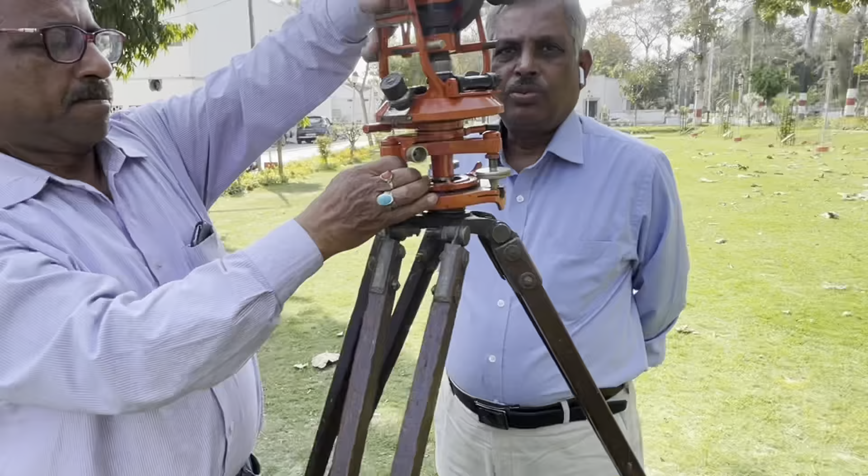So this is the tripod. We are going to mount the instrument. This is kept in a box in a special manner, and this is the 20-second vernier transit theodolite. The fixing of the theodolite on the tripod, and this is the plumb bob.

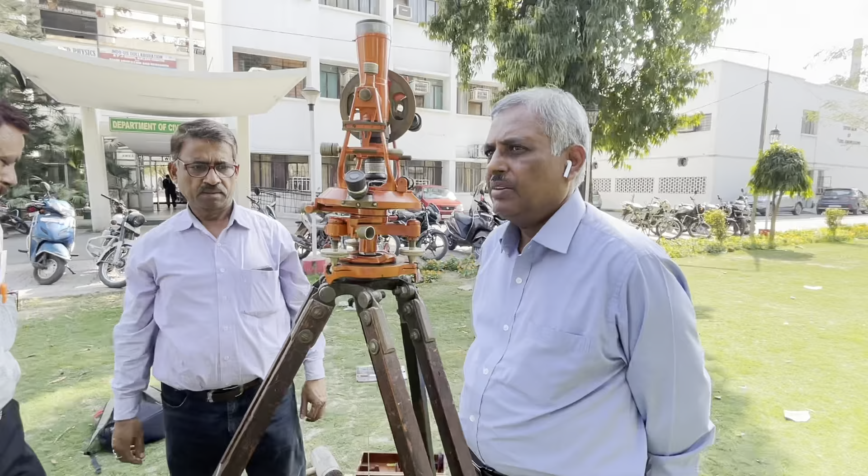Here we can take, this is the vertical axis of the instrument, and to locate the plumb bob shows the vertical plane. So in this instrument there are two planes, vertical plane and horizontal plane. Both are there, horizontal axis and vertical axis. Whereas in the dumpy level there was only a vertical axis, there was no horizontal axis.

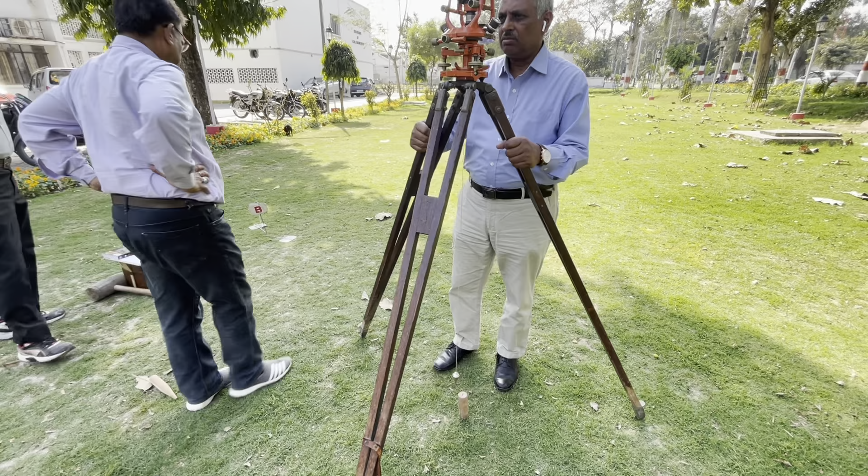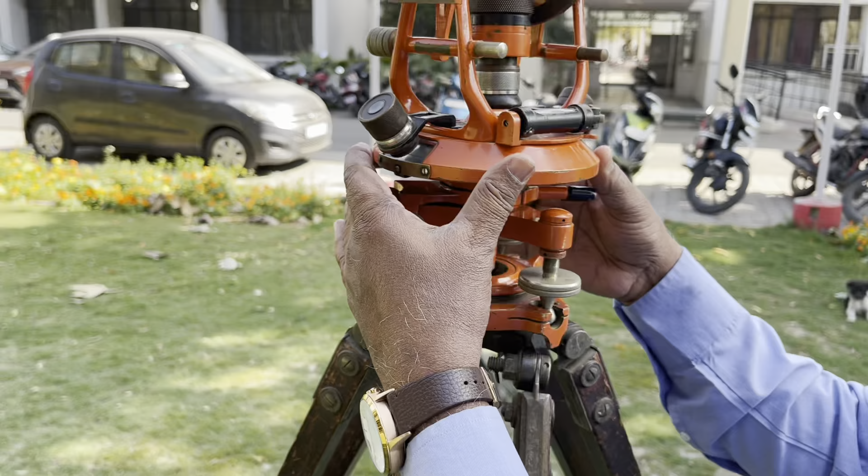So now we can start with the different parts of this instrument. This is the tripod, as it was used also in the automatic level or in levels. These are the three foot screws. With the help of this bubble, which is called a plate bubble tube, this will be leveled, and this is for making parallel two of the foot screws, because this is a longitudinal bubble.

So we have to ensure the bubble is in the center. We have to use these screws either both inward or outward - one will be clockwise, the other anti-clockwise. So both will be inward or outward.

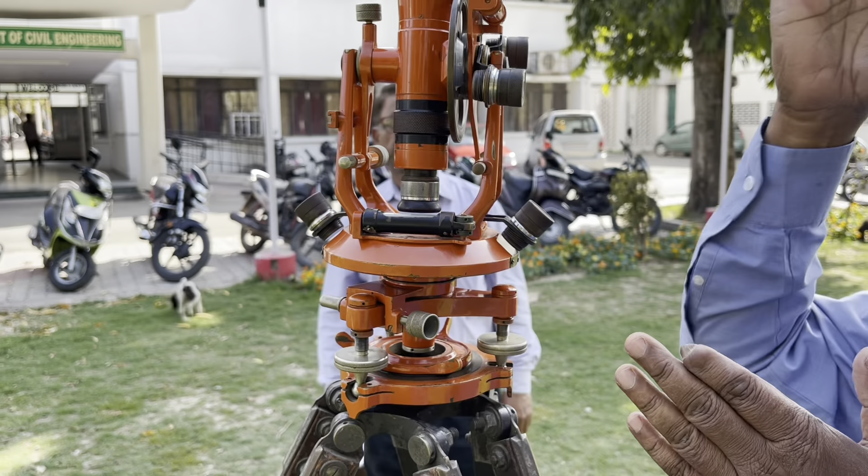Then you turn this by 90 degrees, and with the help of this, in this plane the bubble has been adjusted since it was centered in this plane. Now perpendicularly it has not been adjusted, so with the help of the third screw you bring the bubble to the center, and therefore the perpendicular plane, and the plane perpendicular to that, is leveled.

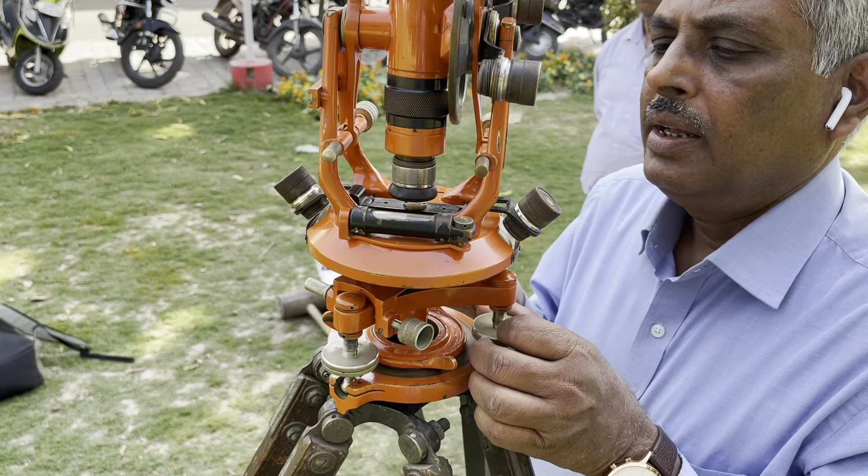So the whole telescope plate is parallel to the ground. This is the bubble in the center. Again we check at the earlier station and see the bubble is out. These are parallel to these two foot screws. Then you have to bring the bubble to the center. One or two trials you have to do, then it will be at right angle, and with the help of the remaining screw...

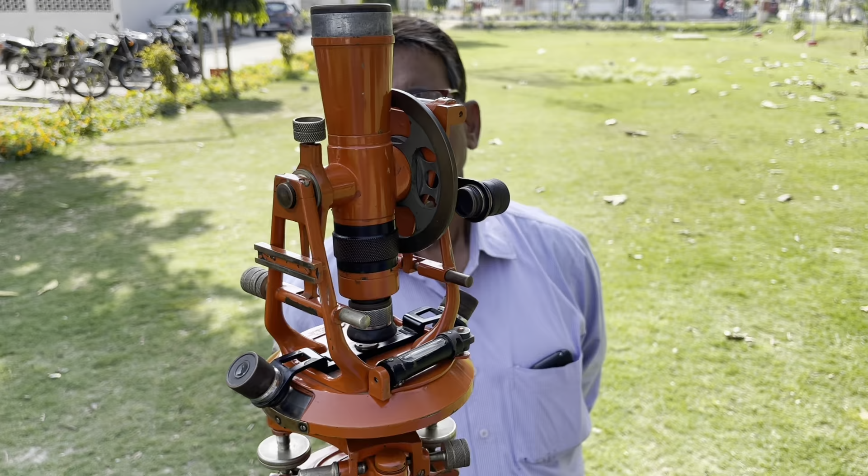The bubble is in the center. So after one or two trials, the bubble being in the center means the horizontal plate level is parallel to the mean spheroidal surface and mean sea level. That is also called geoid.

Now I am going to give the nomenclature of different parts of this instrument. These are the foot screws or leveling screws. These are the two fixing screws. There are two plates here.

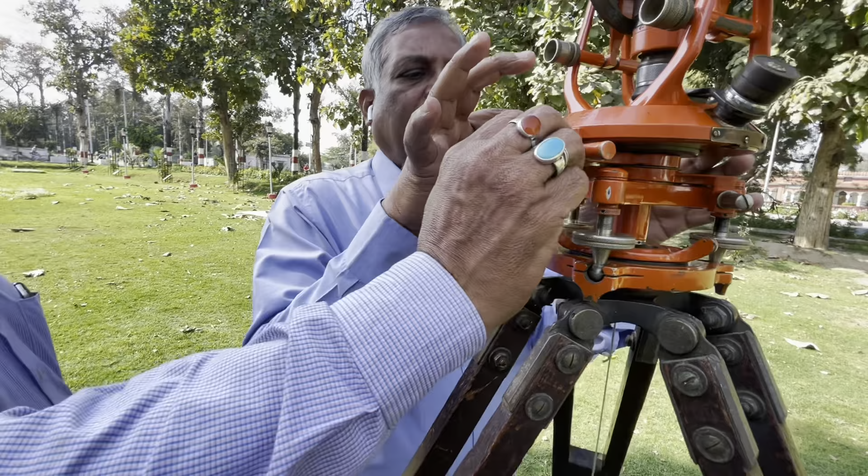One plate moves on the lower plate, the upper plate moves on the lower plate. This is the lower plate clamping screw. This is the lower plate. If you clamp it, the lower plate will be clamped. Then the lower plate is clamped. This is the upper plate clamping screw. If you clamp the lower one, the lower plate will be clamped, and the upper will be moving on the lower because it is free.

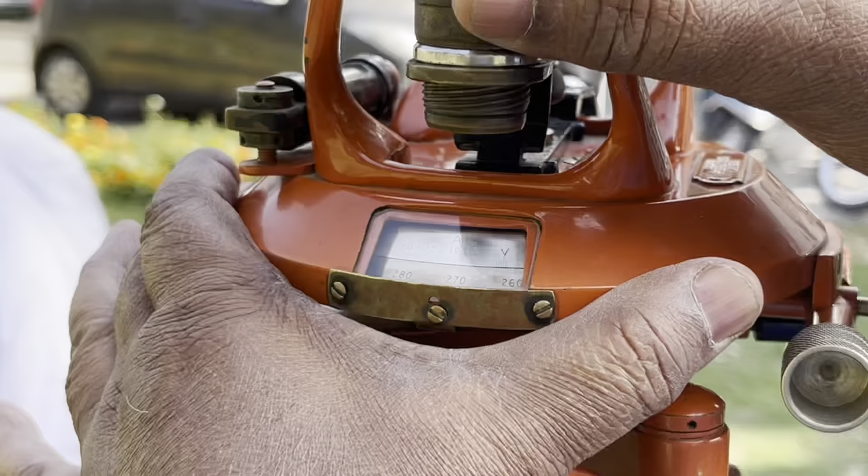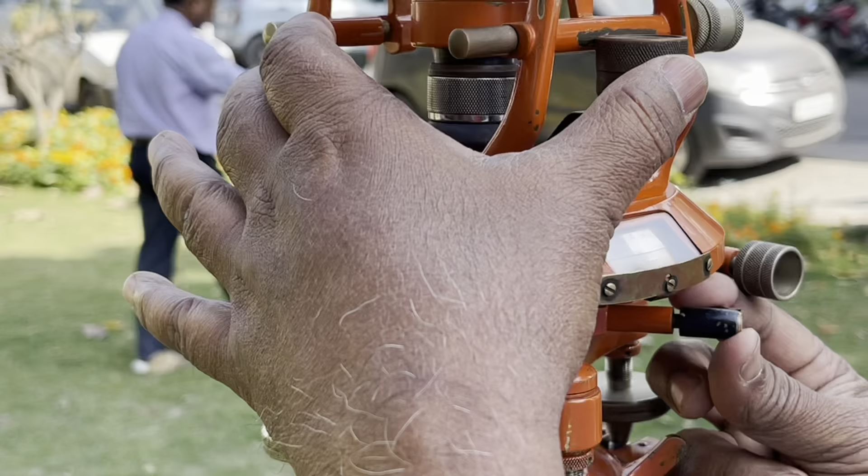So the upper plate will be moving on the lower plate. You can see the upper plate is moving, not the lower. But if I fix both, nothing is moving. If you open the lower plate, both plates will move simultaneously. There will be no change, only both plates will be moving.

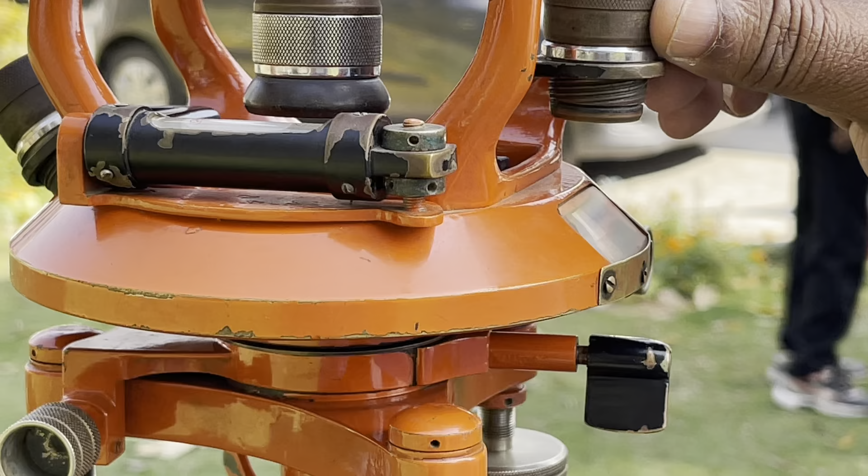So this is the lower plate clamping screw. If you clamp the lower one and open the upper one, then the lower is clamped and the upper is open, so the upper will move on the lower, and then we can read the readings.

These are the two magnifying glasses. There are two verniers, one on this side, another on this side, 180 degrees apart. By simply rotating, the digits on the plate will be focused. These are very small digits; if you use this, the digits will be magnified.

If you want horizontal slow motion, both the lower and upper clamp should be clamped. Upper screw and lower screw should be clamped, and then you can use the horizontal slow motion. This is the horizontal slow motion. If you see, it is slightly moving, very fine movement. This is called horizontal slow motion.

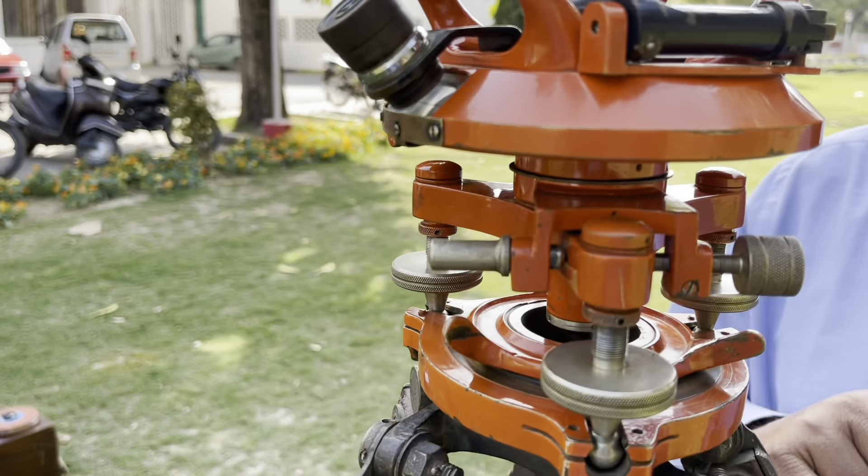So if you want to change the position of the object and the reading should not be changed, this lower slow motion is being used.

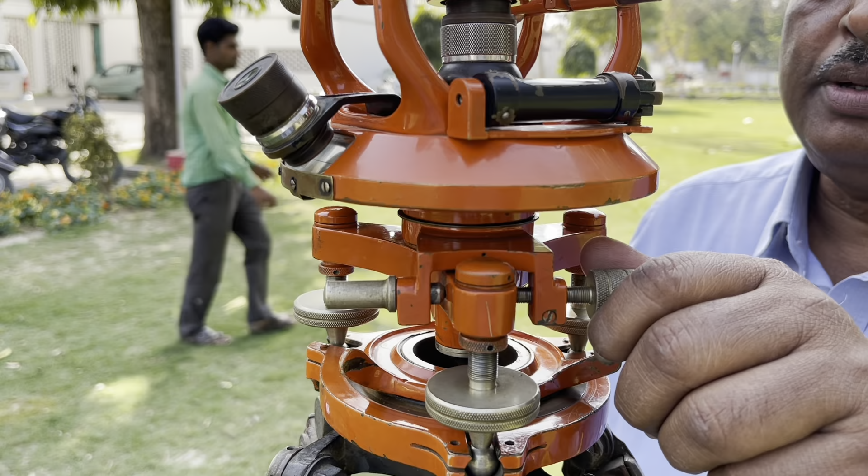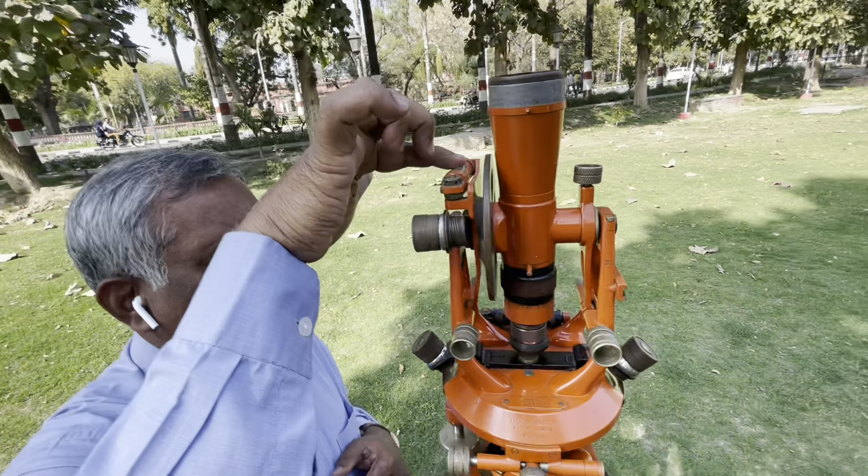Now this is the plate bubble tube for the level of the ground. Now coming up there are two screws. One is just below the one tube. This is also here a tube. A bubble is there. This is called altitude bubble tube. Just below that is called the tangent screw.

Bubble tangent for the adjustment of the bubble. This is just below that. This is called adjustment of the bubble. If the bubble is not in the center, we can bring the bubble to the center with the help of this screw.

This other screw is called a tangent screw, and just below this bubble is called the clip screw, C-L-I-P. This is all known as clip screw.

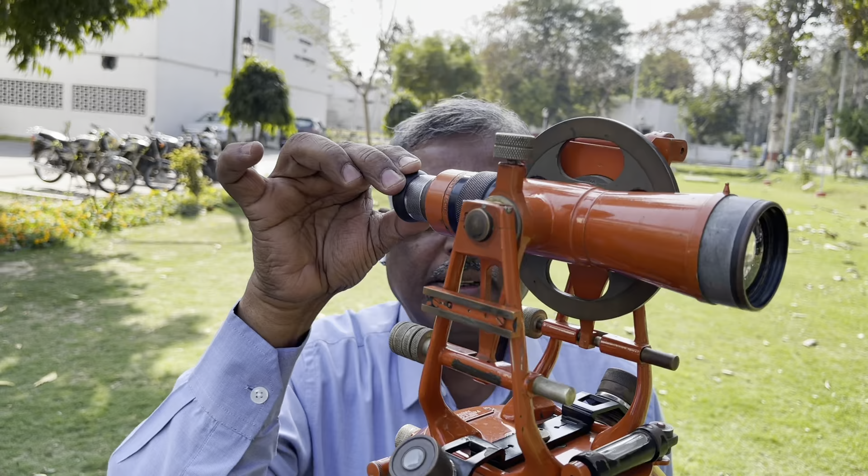Now this is the telescope - if I clamp it, the telescope will be clamped. If I open it, the telescope will be moving. It can move 360 degrees. That's why it is called transit. If it is in this side, and if I make it go to this side, this is known as transit process.

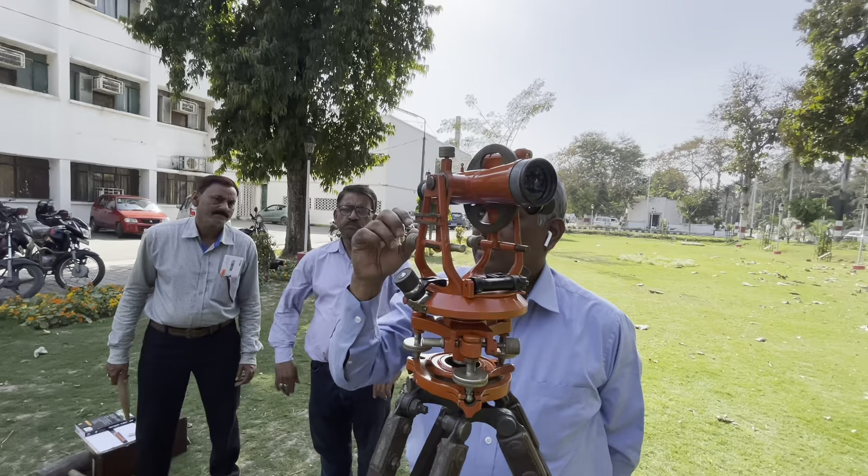And you are seeing this side. Now I am going to see that side. So this facility is known as transit facility. The telescope has been transited. If I close it, it will not move.

And then if I am interested to have slow vertical motion, this screw can be used for slow vertical motion. You can see if I use this screw, the telescope is slowly going upward, and that's why it is called the tangent screw for the telescope, for vertical slow motion of the instrument.

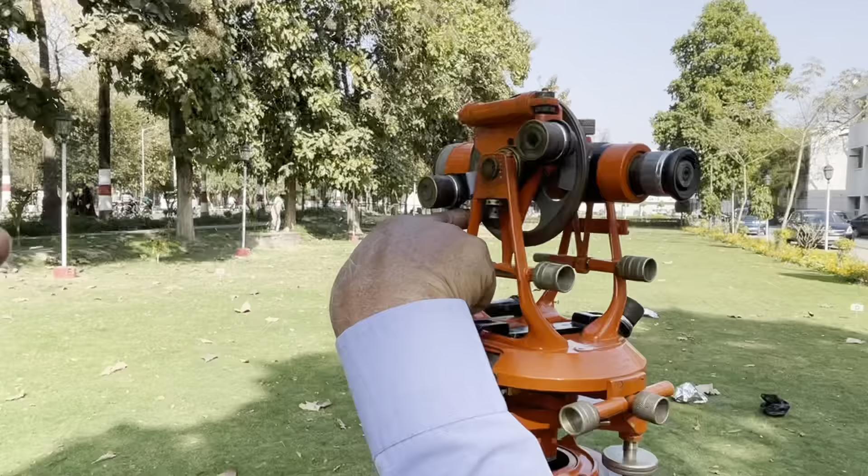Like the horizontal plate, there is also a vertical plate, a circular vertical plate here to read the vertical angles. This also has Vernier scale readings. There are also two microscopes and two verniers. So they are 180 degrees apart.

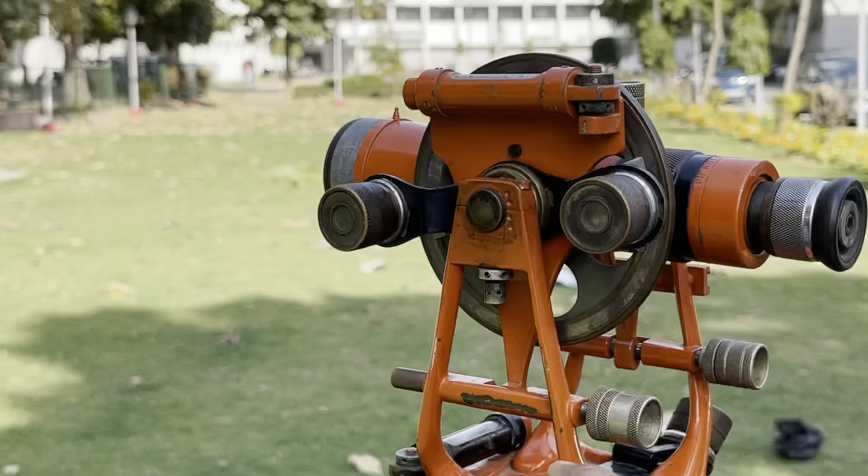So this is the A and B, and this is called the C and D verniers. If it is moving, the other one will also move by the same amount. But if there is any eccentricity error in the plates because of these holes, if this is not the same as this, then we take the mean value to remove the errors.

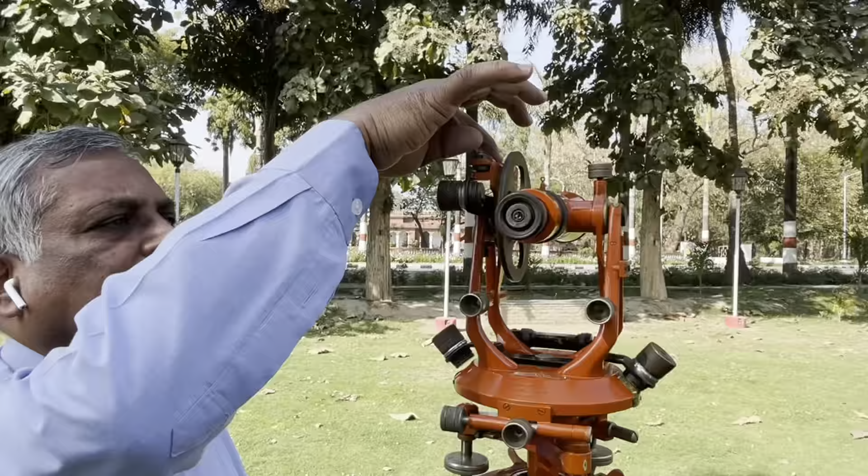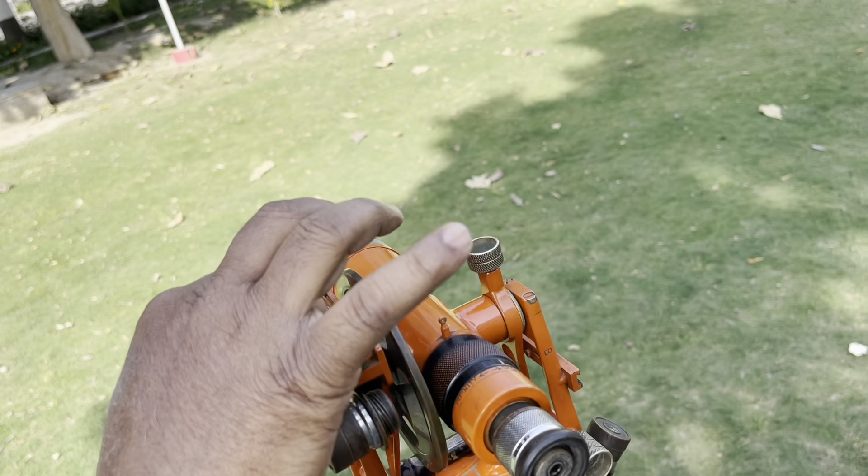So these are the different parts we have elaborated. This bubble is here and it is connected with a nut and screw, nut and bolts. If I want to change the bubble setting, there will be a screwdriver here for this hole. If I use that and move it, the bubble will move. During permanent adjustment, we need to shift some bubble errors, and that's why this is called the capstan headed nut.

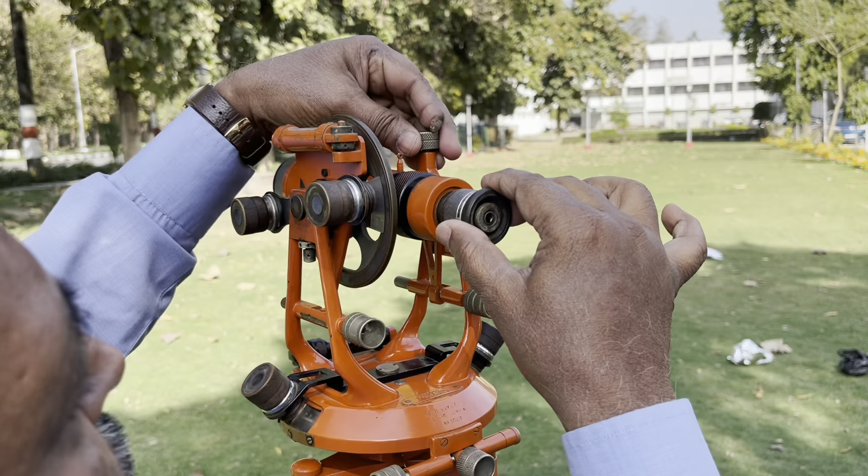And so these are the things. This telescope is moving in the vertical plane about the horizontal axis. So this is the horizontal axis about which it moves in the vertical plane. So this is the horizontal axis, and the instrument is

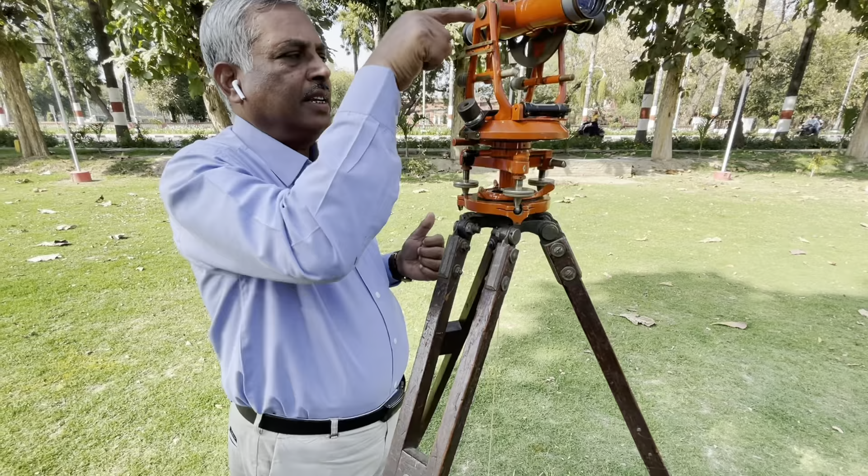moving in the horizontal plane about this vertical axis. So there are two axes: one is the vertical axis and one is the horizontal axis. These two axes must be perpendicular to each other.

If they are not perpendicular, we have to adjust the instrument, and there are different methods to adjust it. It may be taught in class how to adjust the different conditions of this transit theodolite, this 20-second transit theodolite.

So after that, this is the object focusing screw. This is the object glass. This is the object focusing screw, and this is the eyepiece. Due to this, we are moving it, and the object will be focused, but the thing is not coming out.

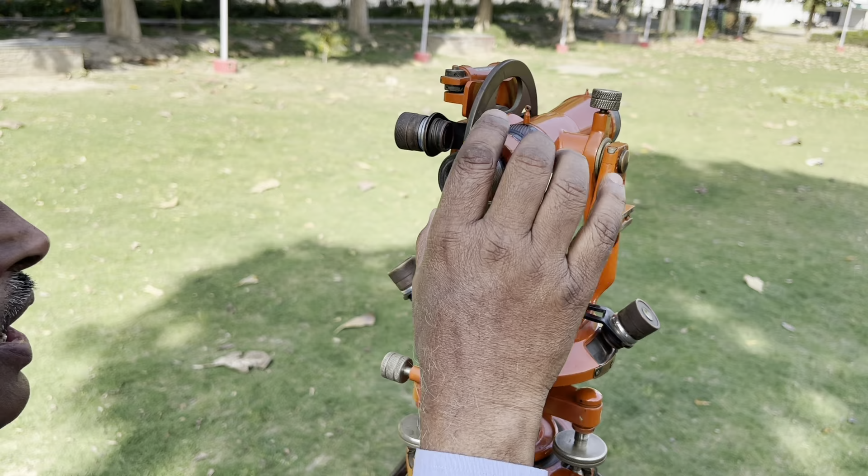That's why it is called an internal focusing instrument. If I am moving this, there is a crosswire here, and that crosswire will be focused. This is called the diaphragm, where the crosshairs are fixed.

There are four screws, one here, one here, one here, one here. So two vertical screws, two horizontal screws. Due to this vertical screw, horizontal wire is fixed, and this horizontal screw, vertical wire is fixed. Therefore these wires are at right angles to each other. If they are not, we have to make it right angle, because it is the condition that

the wires must be perpendicular to each other before using for any experiment. So all this is the diaphragm. Below this diaphragm, and between this diaphragm and objective, near the vertical axis, there is another lens which is called the anallactic lens. With the help of that lens, the multiplying constant will be 100 and the additive constant will become 0, with the help of that anallactic lens, which is provided between the vertical axis and the object glass.

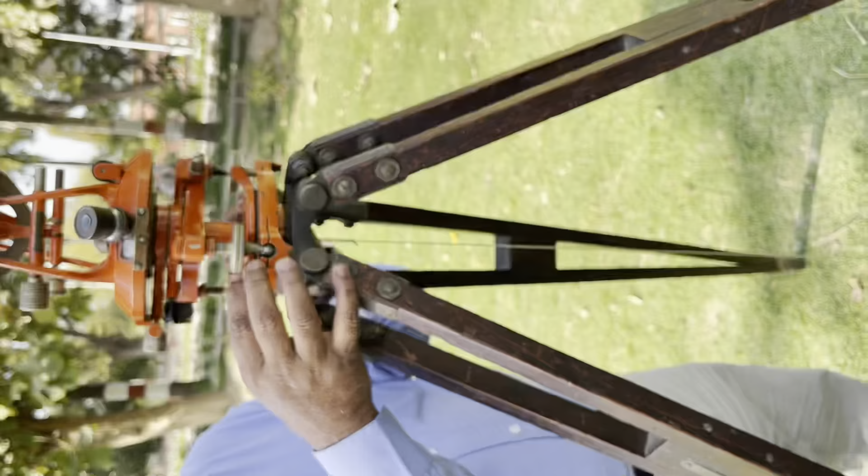So this vicinity we have to provide. This is known as the shifting head. If this is slightly away from here, we can open it and move it here, and centering will be done. If it is slightly out, this is called the shifting head, and then you can clamp it. So this is known as the shifting head.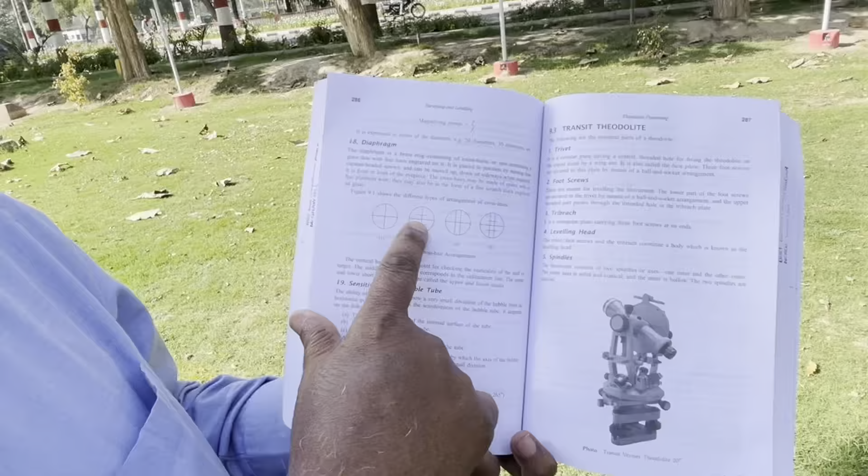Now here the wires that have been mounted, that is like this, this is the wire that has been mounted here. There are many ways to mount the wires. In some instruments, double wires are provided, then stadia wires. In some, two vertical, one horizontal. In one, horizontal, one vertical, and two stadia wires. In one, only horizontal and vertical.

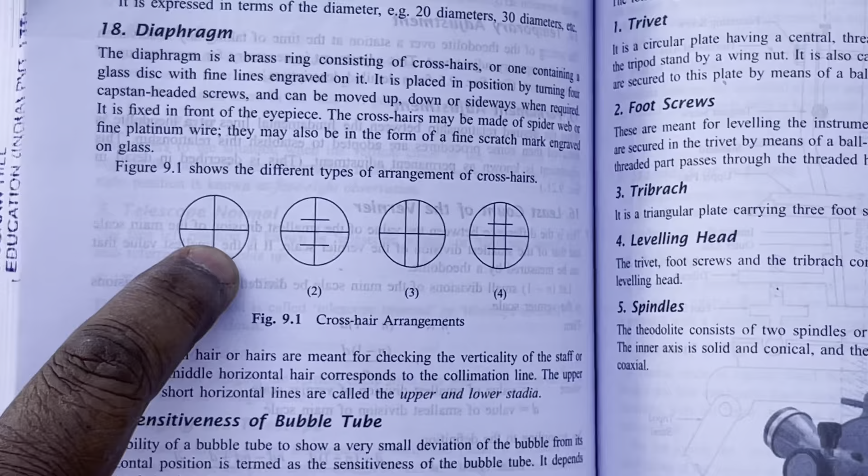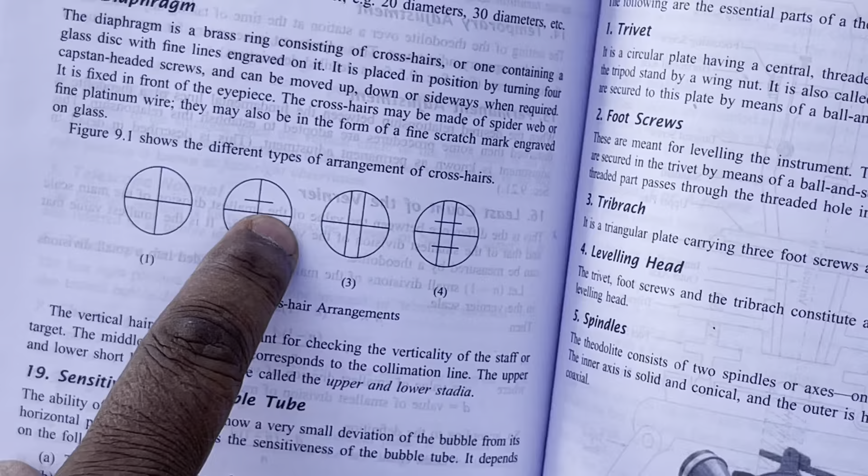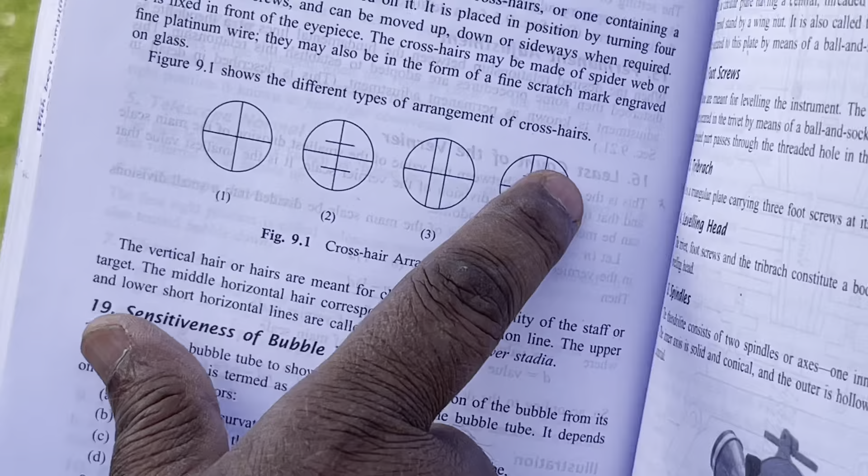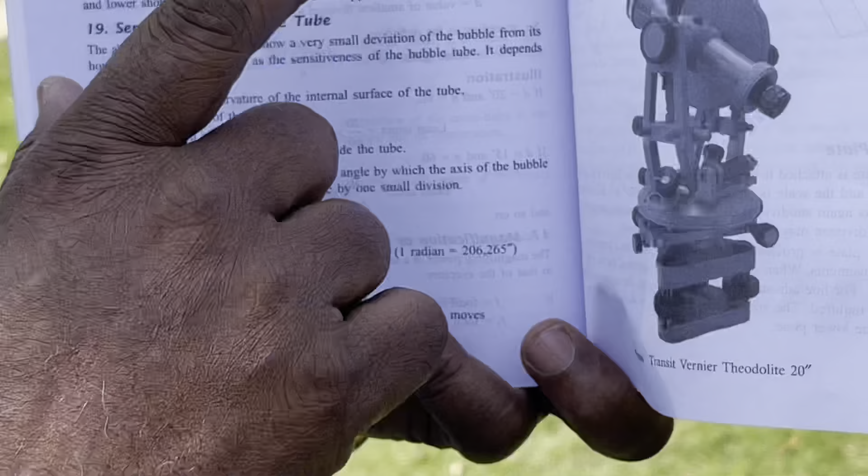If this is used, then you can only read the horizontal and vertical angle; the distance cannot be obtained. If you are using the stadia wires, you read the top wire reading and bottom, then you will get the distance also. Horizontal angle and vertical angle can be read out, and the distance also can be calculated. Here only horizontal and vertical angle, here horizontal, vertical and distance. These two wires are only because of the confidence that this is perpendicular to this, so this is the extra security arrangement.

Now this is the instrument, and this is the same instrument as we are using here. Different parts are shown here. Different parts are here. You can read it in the books also. I have explained different parts, and different parts are being shown here.

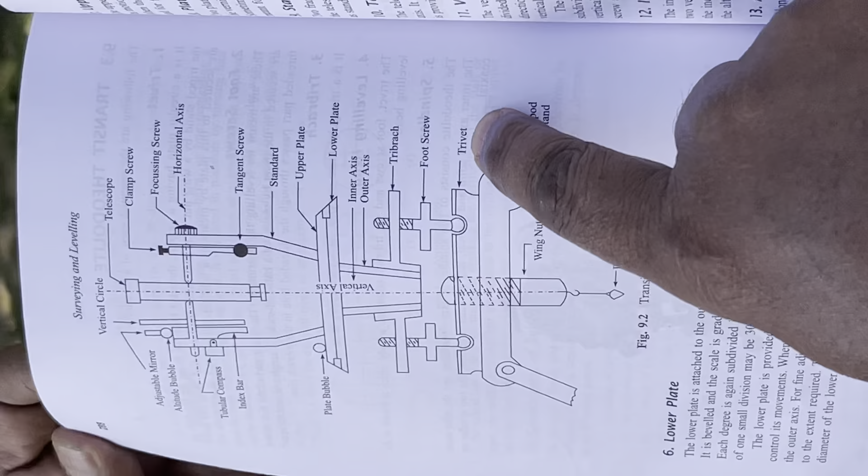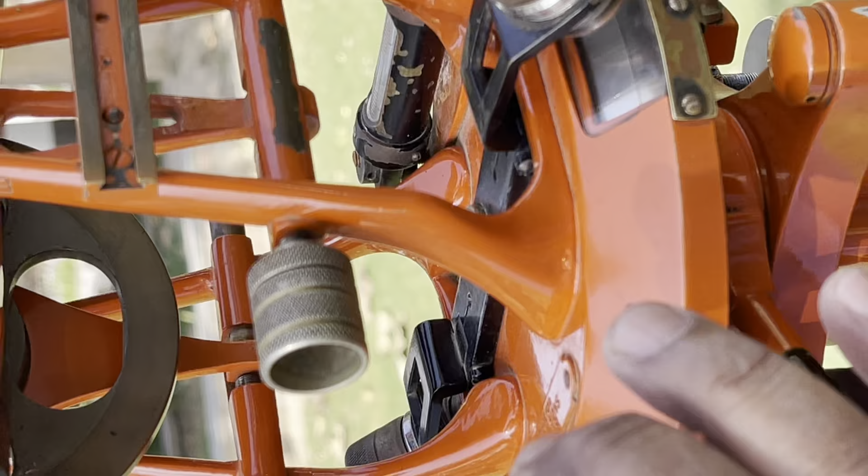A tripod, this is the trivet, the foot screws, tribrach, inner outer axis, lower plate, upper plate, or a standard A frame. This is called a standard A frame because it looks like an A. That's why A frame. And there will be a tangent screw. This is the tangent screw. This side will be the clamp screw. There will be different parts. You can go through this and you will be given the different parts of it.

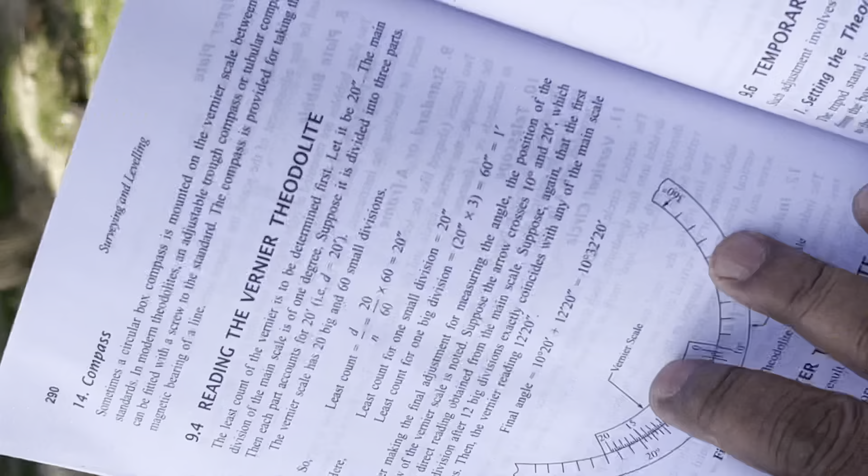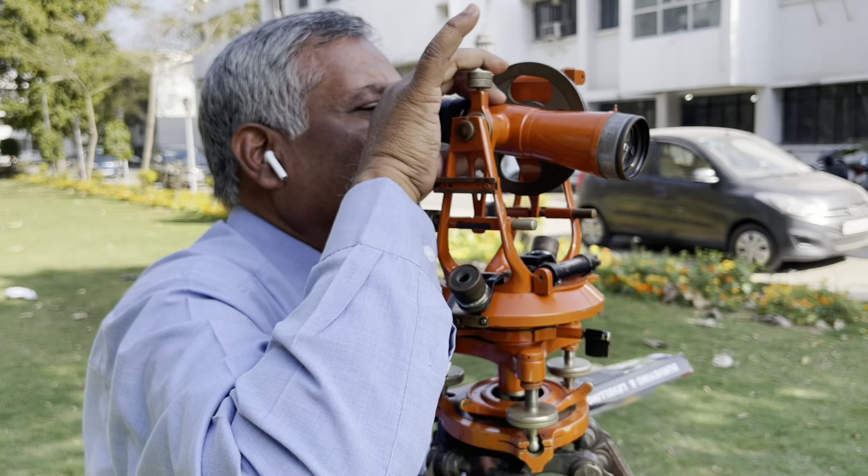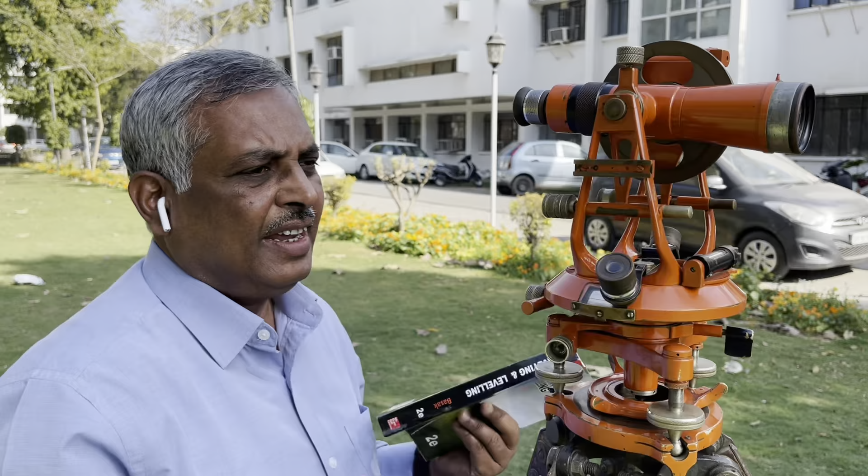Then what will you do? You sight any target. So there is station A here, in the ground, and these are the markers. If you have the instrument, you put it in position and see the A station, and then you focus it with the help of that. Once it is in the vicinity, you can focus. First you focus the horizontal cross here, and then the eyepiece. So this point A will be focused here, and at the first point we have to make it zero.

So the vernier here should read 360 degrees.

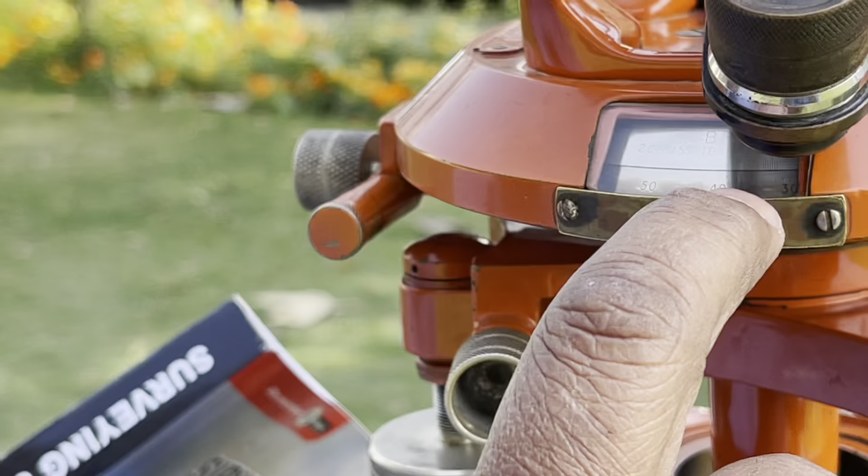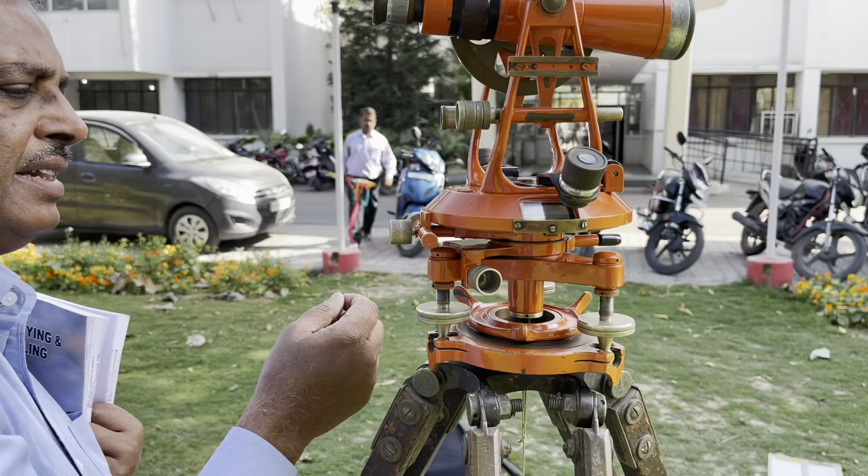So we will put the 0 here, and now both the horizontal and vertical clamps will be clamped. Horizontal as well as the vertical will be clamped. If it is out from the target, then we can use the lower slow motion to bring it to the vicinity of the target. Once 0 is transferred at A, now I am not going to use this lower slow motion anywhere. Only the upper slow motion will be used. This screw is for upper slow motion.

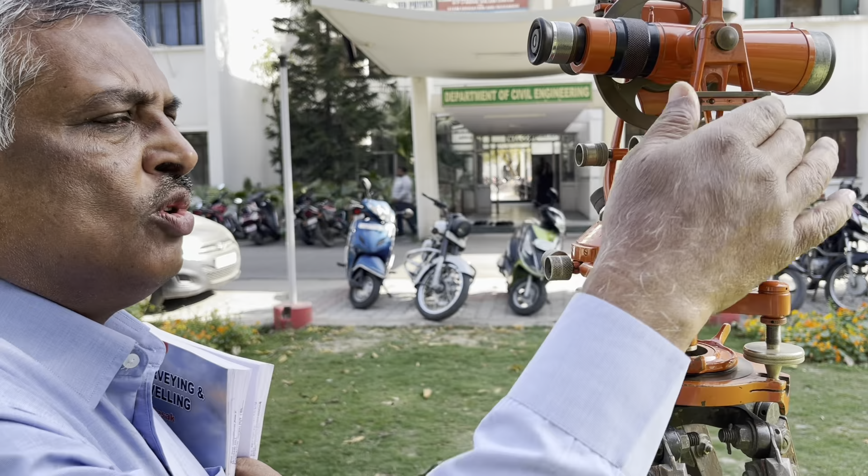Now I open it and move towards B. This is the B station. This is the station B, and we have to sight the station B and the positions. Moving in this direction and sighting the station B, we have clamped the lower one and we have opened the upper and we are moving from A to B, or B to C. Open it and move B to C like that.

And whatever the movement is here, because the lower is closed and the upper is moving, whatever reading comes here, we have to record that reading. That will be the horizontal angle from A to B and then B to C. So how to find A to B and B to C? You subtract B minus A, you will get this angle, and you subtract C minus B, you will get the horizontal angle BOC.

So if you are observing the horizontal angle this way, this method is called the reiteration method. There are two types of methods for observing angles. One is reiteration, the other is the repetition method. In the repetition method, you take a 0 reading here, sight the object, and then go to station B, say it is 10 degrees 10 minutes, fix that 10 degrees 10 minutes and bring it to station A. Then go to station B and it will be 20 degrees 20 minutes like that. Fix that, bring it to A. So this is called repetition, measuring the same angle many times.

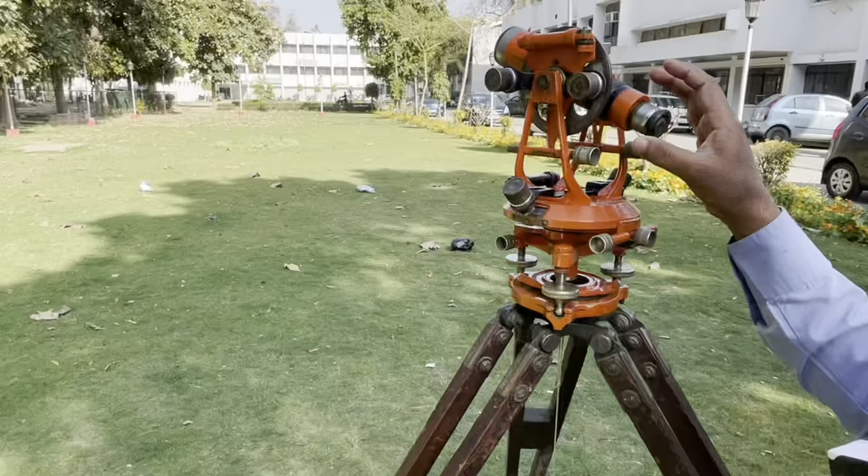So we fix it. Whatever the angle of elevation is, you read vernier C and you read vernier D. Take the mean value and that will be the vertical angle. At the time of observing the vertical angle, this bubble must be in the center. So bring the bubble to the center with the help of this screw. This is called the clip screw, and then read the vertical angles.

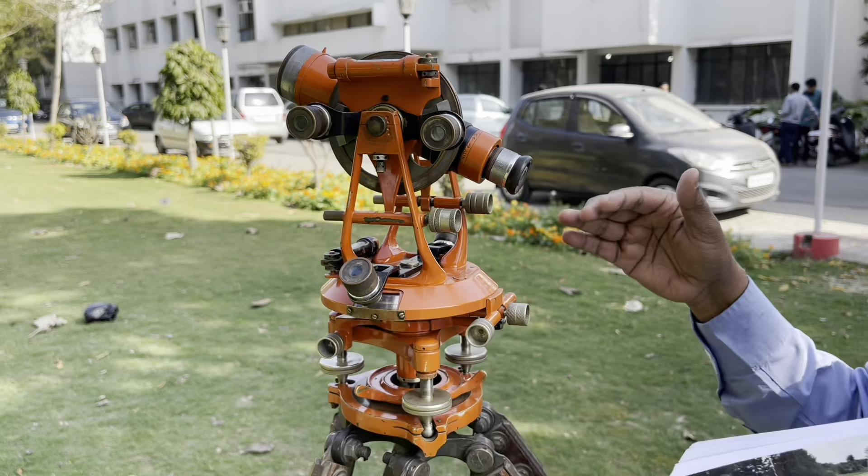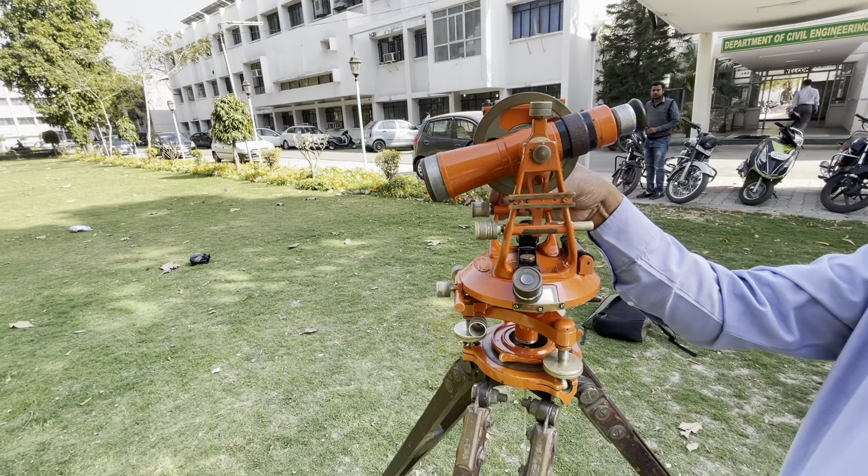If I am observing from this side and the circle is to my left hand, then it is called left hand observation. If the circle is to my right side, then it becomes right. So this is called right hand observation. So there are 2 types of observation: one is left hand observation, the other is right hand observation. If you are starting the left hand observation, you keep 0. If you are starting the right hand observation, then it will be going from 360 to 0 again.

So left hand and right hand. Why are you doing that? Because the whole is 360 degrees, the right should also be the same, but because of some error in the plates or looseness of the springs or these bolts, there may be some error. So if you take both faces and average them, the error will be eliminated. That's why readings are taken on both faces. This process, face left and face right, is used to eliminate the error.

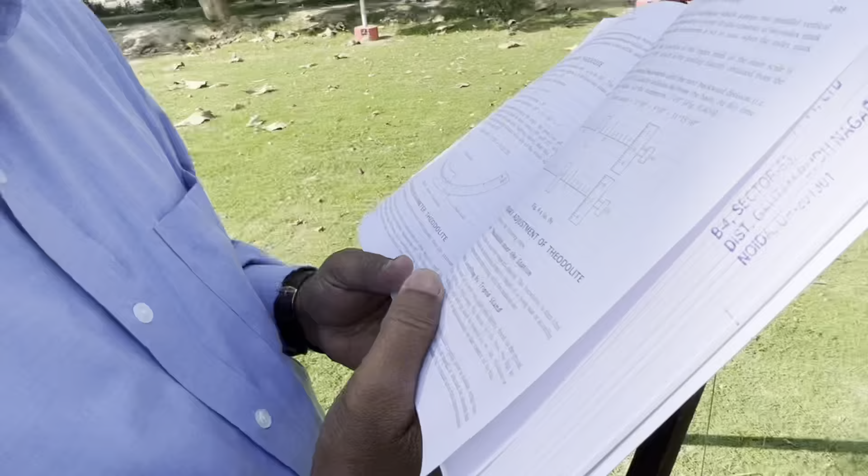Now how you have to record the readings, that is the main thing. Now this is the main scale. Here the angle is from 0 to 360 degrees.

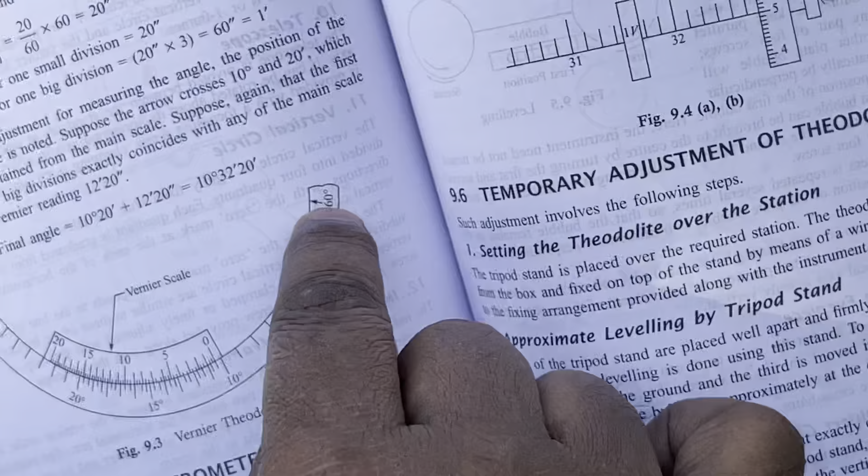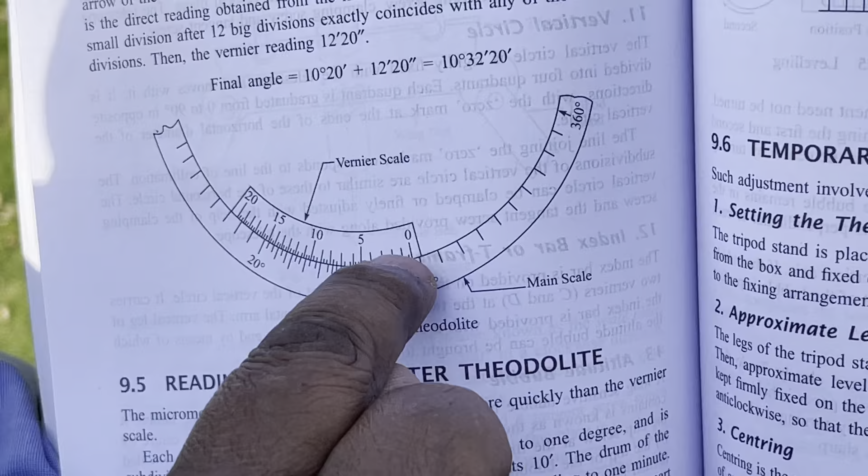Here is the 360 degrees, and there is some vernier scale. This 1 degree has been divided into 3 parts, so one division of the main scale is 20 minutes. Now this 20 minutes is further subdivided on the vernier scale. So one minute is further subdivided in 3, so therefore one division reads 20 seconds. Therefore this is the least count of this instrument.

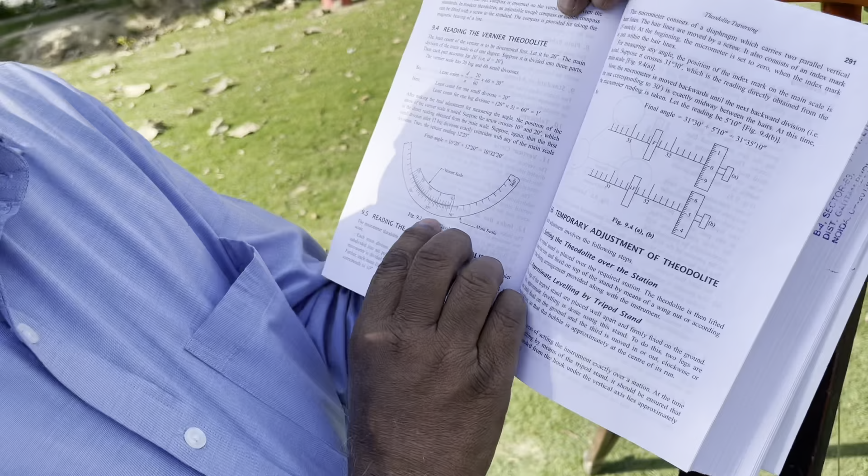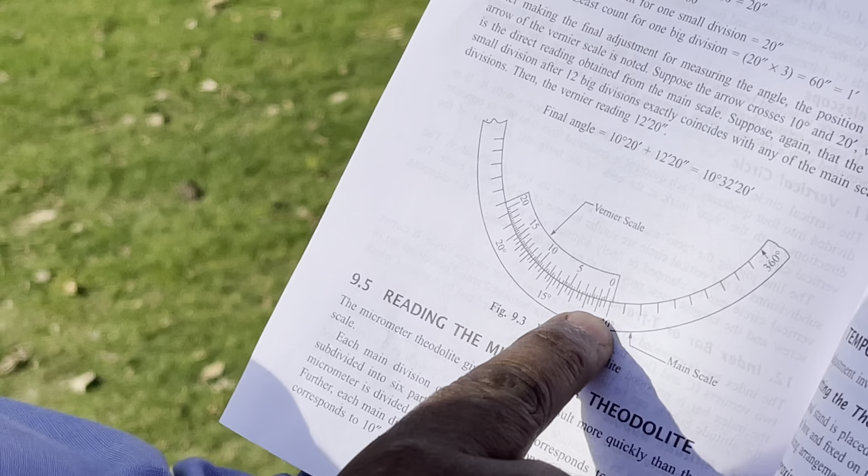Now I am sighting this object C, and the main plate and the vernier plate position is like this. Then what will be the angle? If this vernier crosses any angle, that will be recorded. So now this is 10 degrees, 10 degrees 20 minutes.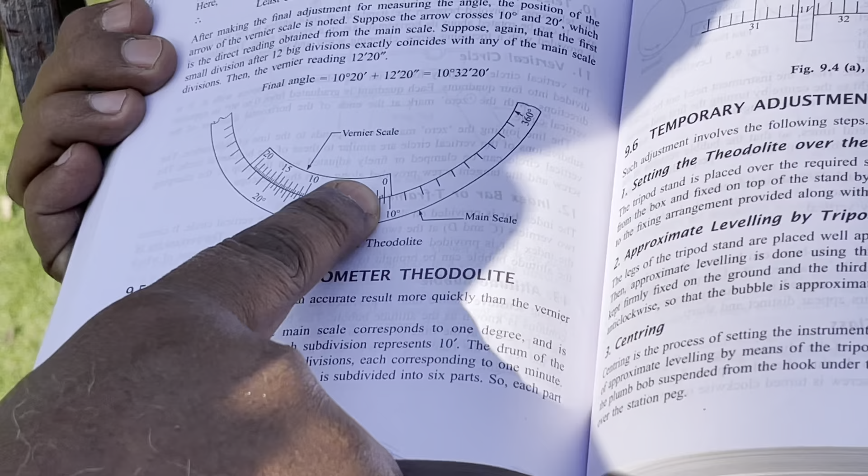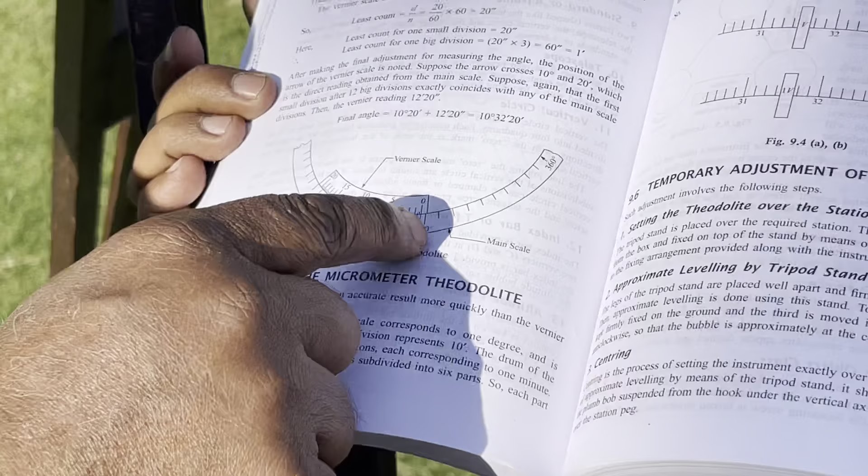So the zero reading, you see, where is the zero? So this is 10 degrees and it crosses one division in the main. So 10 degrees 20 minutes and 1 minute is matching. So 10 degrees 21 minutes 0 seconds is the reading.

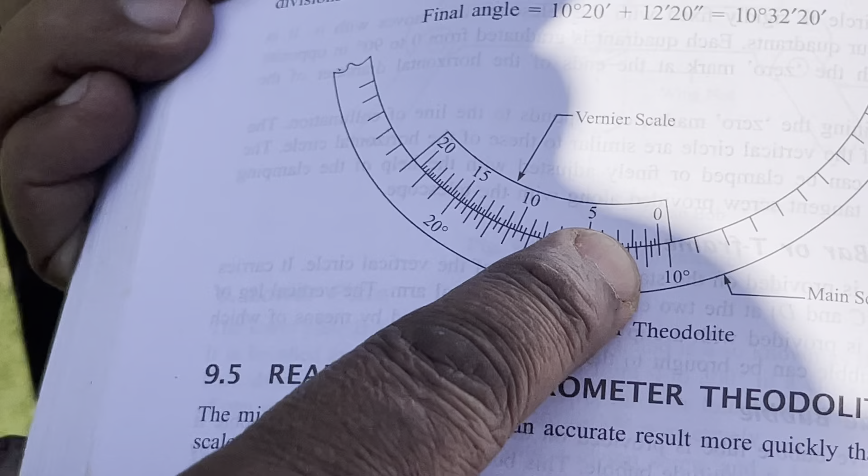So whenever you are going to read the reading, you see which of the main readings this line 0 is crossing. So this is 10 degrees, then 20 minutes, 40 minutes, then ये 10 degree to 11 degree हो जाएगा. Then 11 degrees, 20 minutes, 40 minutes, then 12 degrees. So it is crossing 10 degrees 20 minutes and 1 minute is matching. So this is 10 degrees 21 minutes 0 seconds.

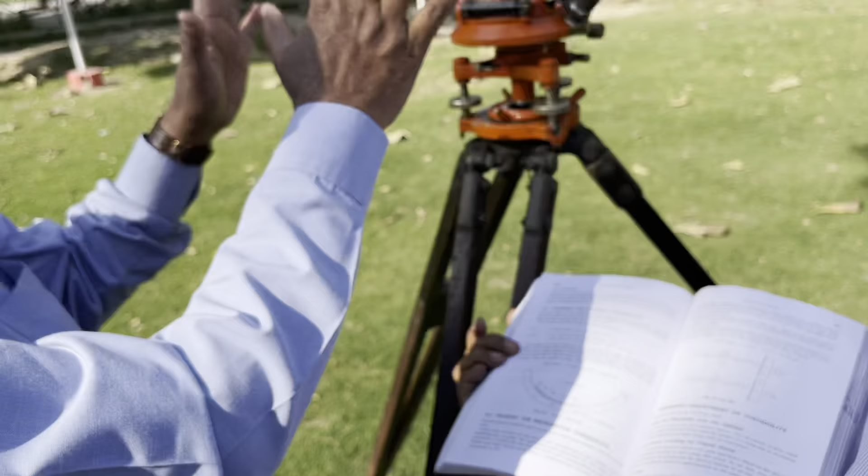In this way, by this instrument, horizontal and vertical angles are observed. For the horizontal angle, going A to B, B to C, C to D, D to A, again going to A, the angle should be 360 degrees. And this process is called reiteration. So this way the whole angle is observed, horizontal and vertical. Today's experiment is only how to observe the horizontal and vertical angles.

You go through the books and see all the parts, which part is for which angle, and also try to learn how to observe the angles. If you feel anything that you are not understanding, then you can ask us, anytime. Thank you. The observation sheet, how to record the horizontal angles.

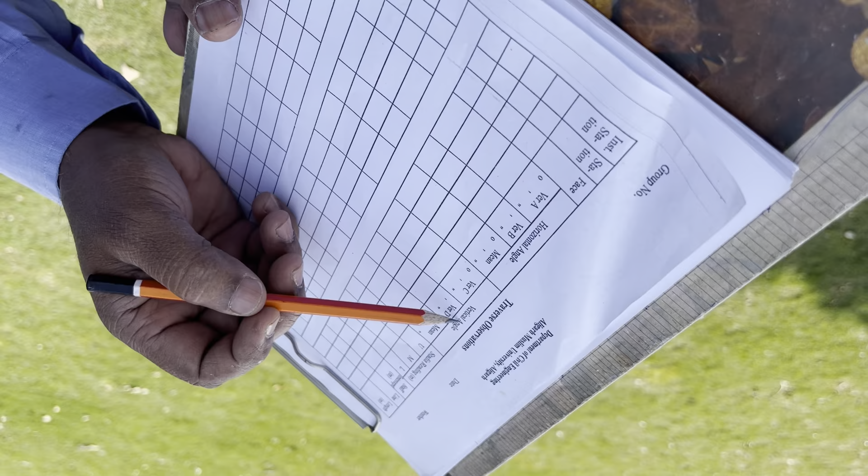So here you can see, this is the instrument station, sighted, face, that I was saying, face left or face right. This is the horizontal angle, this is the vertical angle. These are the stadia readings, upper, middle, staff intercept, line and length. So we are standing at station P, say, and I am sighting A, face is left, and this angle is 0 degrees, 0 minutes, 0 seconds.

In vernier B, we don't record the degree, only minutes and seconds. Why this? This starts from 0. Vernier B starts from 180. So if I am writing 180 and taking the mean, 180 plus 0, it will be 90 degrees, which is wrong. So therefore, only in A is the main reading recorded. In vernier B, only minutes and seconds. Now the mean will be 0 degrees, 0 minutes, 0 seconds. Like this in the vertical angle also, 0 degrees 0 minutes 0 seconds.

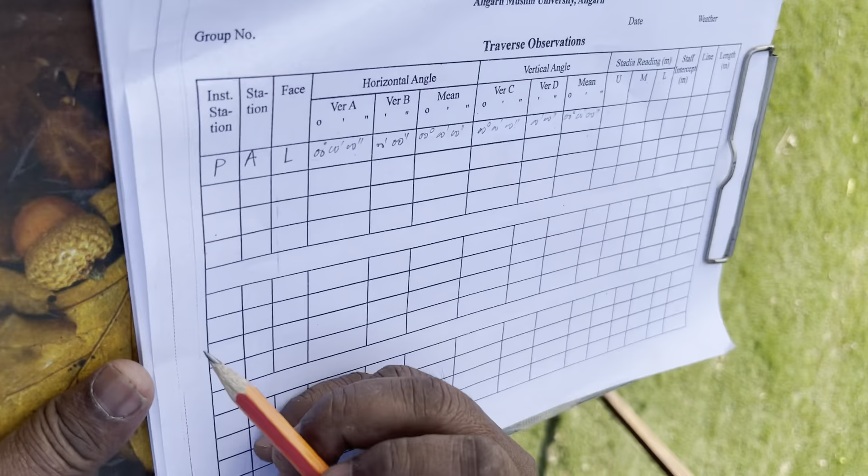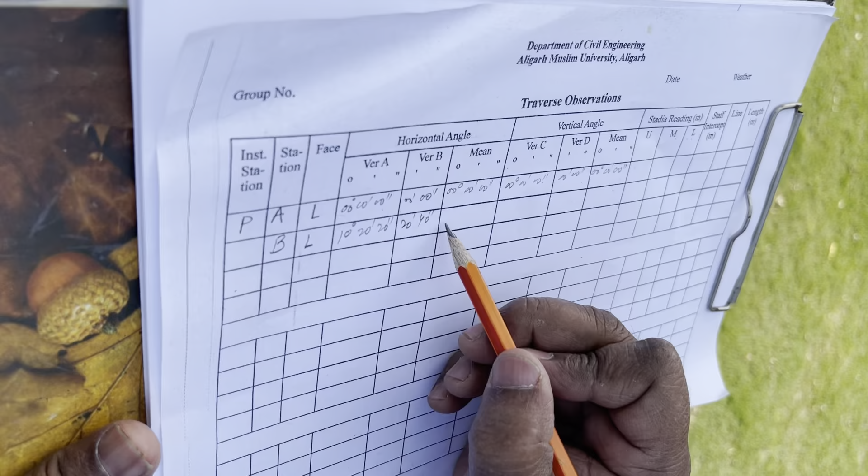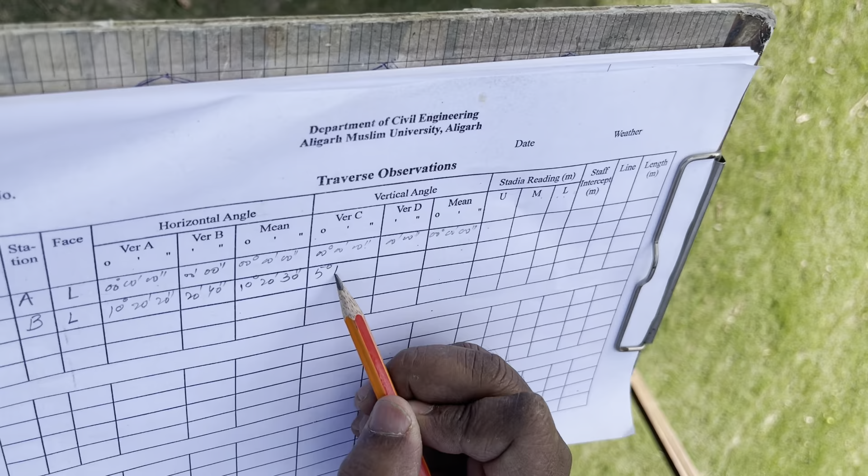Now go to station B, face left. Say this is 10 degrees 20 minutes 20 seconds, and here 20 minutes 40 seconds. Then the mean is 10 degrees 20 minutes 30 seconds. Here also 5 degrees 10 minutes 20 seconds. यहाँ लिखे 10 minutes 40 seconds, 5 degrees 10 minutes 30 seconds.

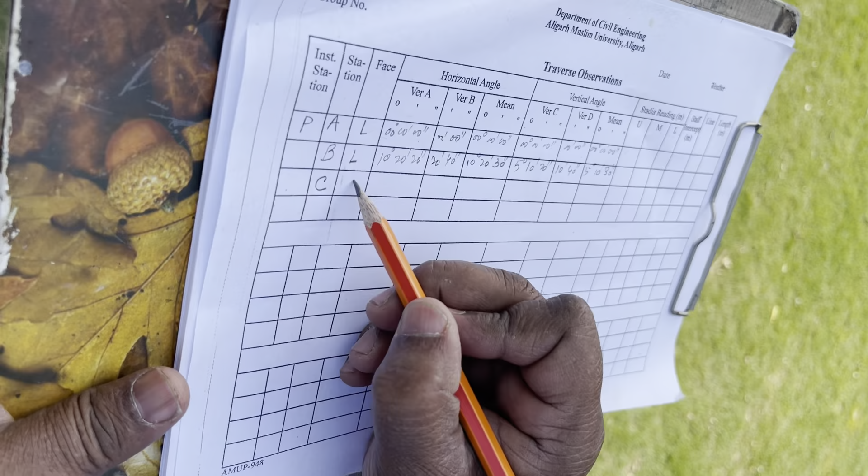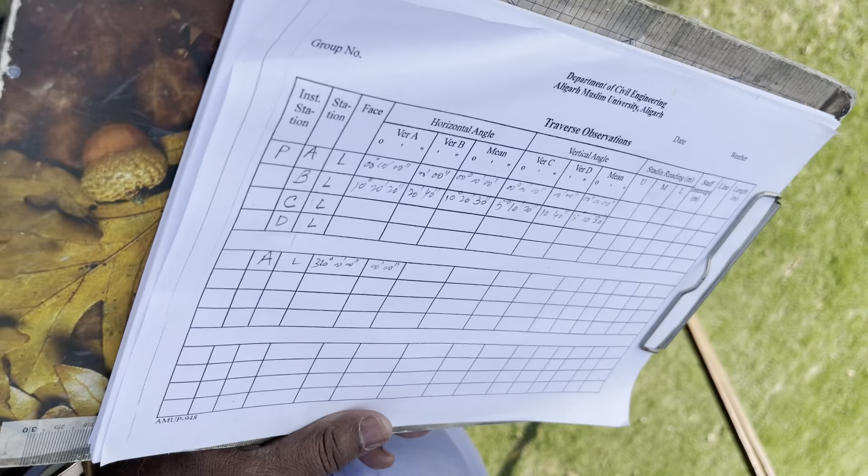So this way you can record C also face left, D also face left, and then come again to A. So this angle should be 360 degrees 0 minutes 0 seconds. If it is not, then we have to apply the closing error correction. This is a closing error. Suppose this comes to 359 degrees, 59 minutes, 40 seconds. So 20 seconds will be the closing error.

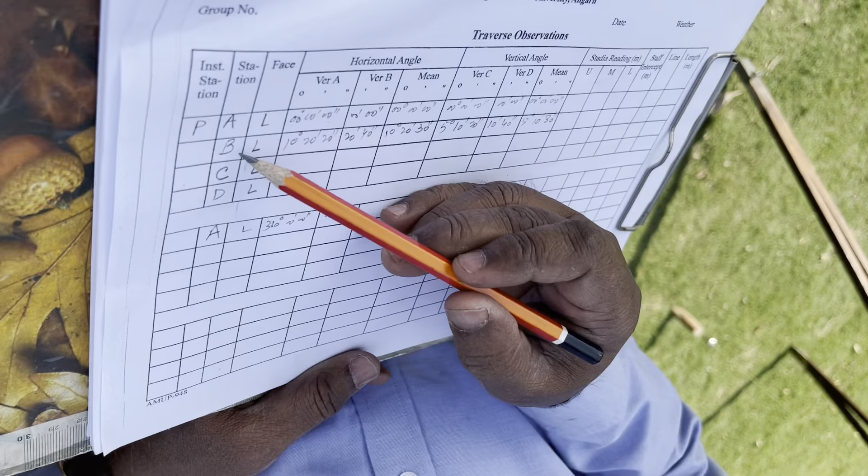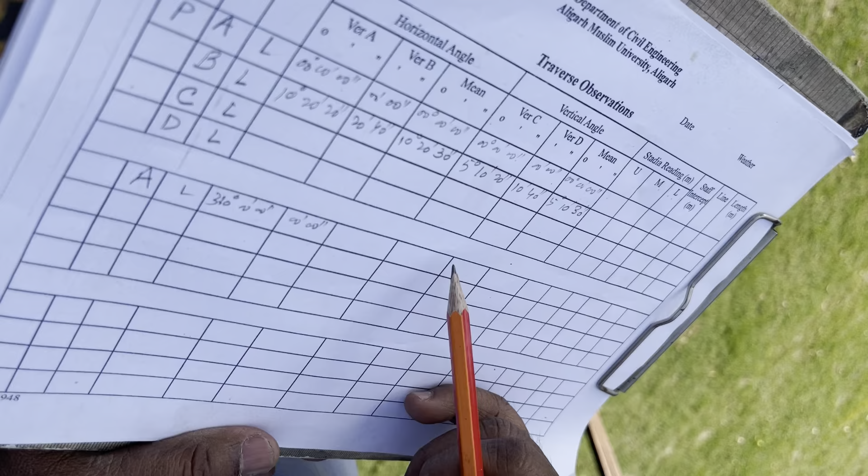If it is less than 360 degrees, it means 20 seconds is to be added. So what we do, you are taking 4 angles, so you divide this 20 by 4, so 5 seconds. So you add 5 seconds in each angle. So this is how the closing error will be distributed among the angles. So this way you can observe and write the observation table.